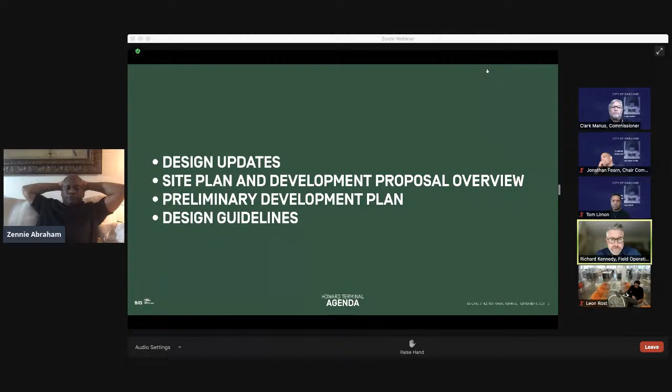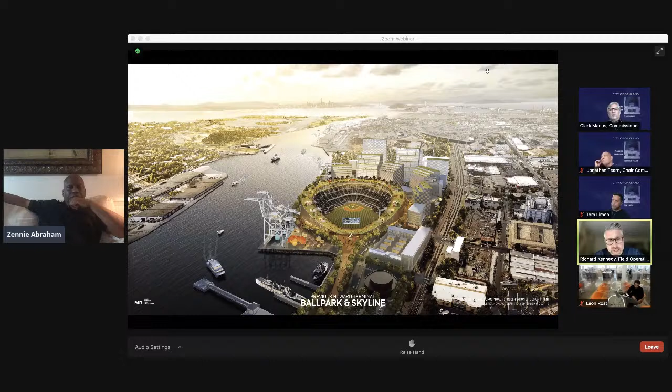This was probably the first rendering that came out about the A's development at Howard Terminal. This was, I believe, in 2018 — the first concept and vision of the Jewel Box ballpark, oriented to Jack London and the Oakland skyline, as close to Jack London as possible, with the adjacent developments just behind on the west-hand side, and then a contiguous public realm that wraps the water's edge. Of course, over the past two and a half years or so, the project has been evolving, in some ways big and some ways small.

This rendering shows some of the larger adjustments, most notably the rotation of the diamond in the ballpark, where the prior diamond faced directly to Jack London. The diamond has been rotated now to provide enormous amounts of views from all seats within the ballpark towards the bay and the sky. So just the simple rotation of position gives so much more visibility from visitors in the ballpark out to the bay and that resource. But additionally, it provides so much more frontage on the public side to look into and peer into the ballpark and all the excitement therein. I'll talk through additional adjustments as we go along.

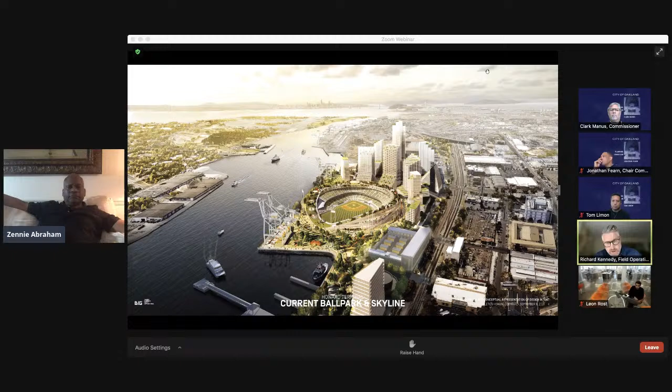On a project of this scale, we found it very important to make sure that as we shift and adjust and revise the framework and planning, it's cohesive — that there's a language there that allows it all to read as a coherent, unified, cohesive whole. That it feels intuitive and comprehensible to walk around, to find your way, and to encounter all of the spaces that we've been dreaming in, building into the plan.

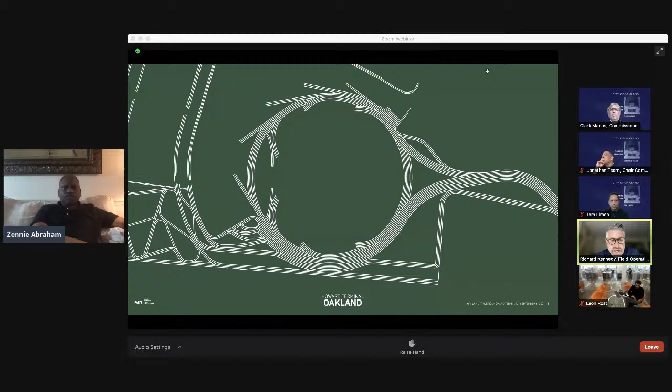And so the framework, as we've done it, is organized in inspiration around the icon of Oakland, the oak, with all of its branches and connections. And we've used that as a metaphor for how we think about circulation in the pedestrian realm, making sure that the pedestrian realm is fully contiguous, connected, universally accessible, and that it's very intuitive on how to move and navigate around the space from one destination to the next.

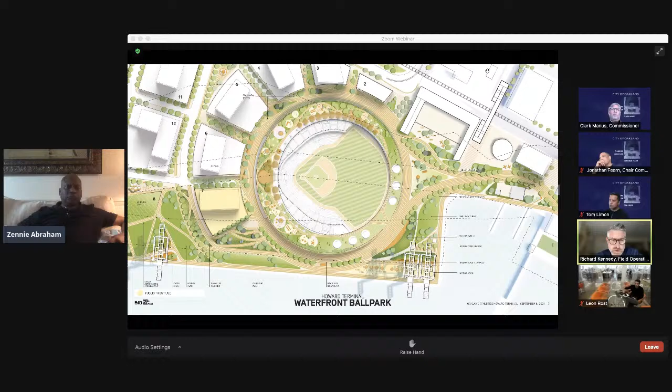So it's largely an organizational idea, but it can also be a material idea in making sure that the ground plane and pedestrian ground plane is specifically cohesive, unified, familiar, as well as being durable and robust to stand all the use that it will receive. And so that language carries through the entire plan, the waterfront, sidewalks and pedestrian realm, and the framework of streets as well. In this plan, you're seeing the full development blocks and arrangement, but you're also seeing the network of public spaces.

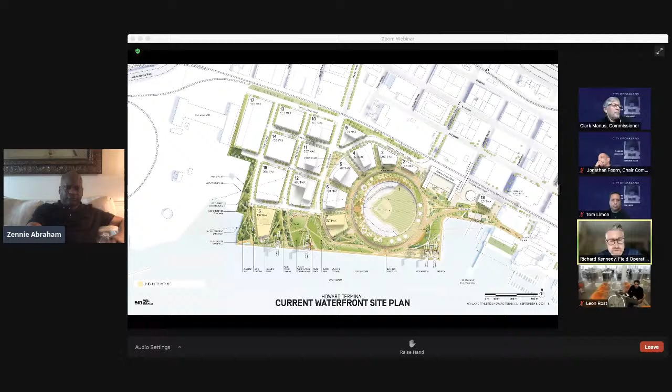All of the green and orange is effectively the public realm, the open space, the trails, the pathways, the plazas and patios and porches, and the green gardens, park spaces, and recreational spaces, making quite significant additions to the waterfronts for West Oakland and Jack London. And this is now an aerial representation of that full plan.

Of course, with projects of this scale, connectivity and circulation and transportation are always a challenge. And for the Howard Terminal site in particular, there's no one solution. It's a multifaceted solution. You can see on the diagram on the right-hand side, which is the percent of arrivals during game day. You can see that they're fairly well distributed from Market Street all the way to Broadway in terms of how people are coming there in various forms.

It's largely pedestrian on the eastern side, more vehicles on the western side. But again, the proportions are largely distributed. Bicycles are then factored in the middle, specifically on Martin Luther King with a designated bike route and entryway.

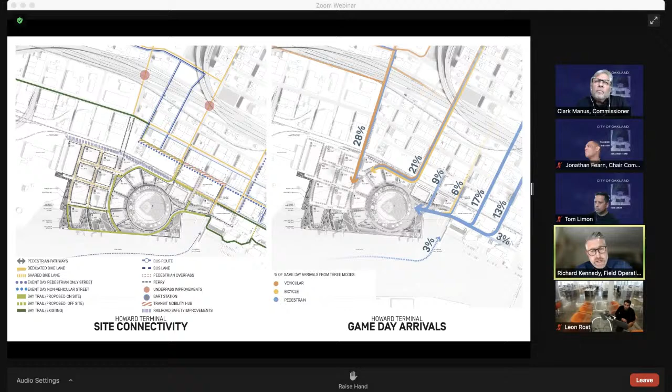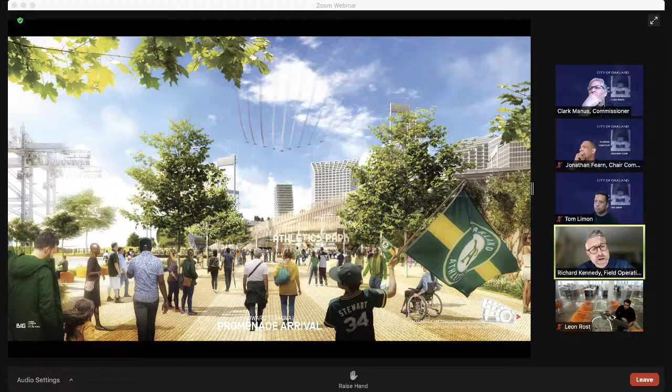The ballpark has been rotated from those initial inceptions, and we think there's a number of key advantages. Most notably is that we're able to still have a picture window that's directly on axis with Jack London, that prior to game time, or maybe possibly even between innings, there's an open window into the field of play and all the energy of the ballpark. But during the innings, the screen would drop down.

You might recall in earlier renderings there was a floating screen at the saddle point, that low point. The advantage of rotating it is that we can now nest the batter's eye and scoreboards in the ballpark without blocking views of the bay. So quite an important adjustment.

Furthermore, the language of the ballpark now pulls you in different directions, pulls you to the right towards Athletics Way, which Leon will speak to in a second, and on the left towards the waterfront where you get magnificent views into the ballpark itself.

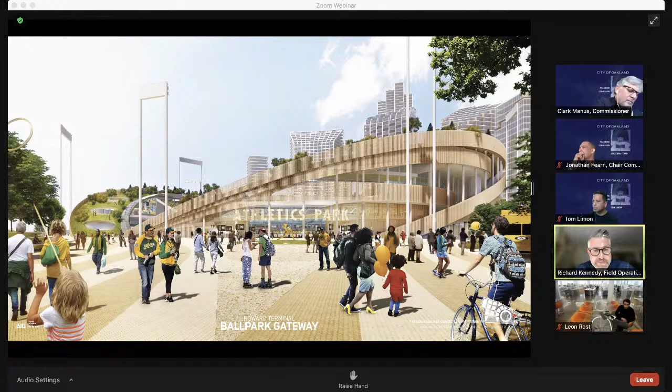There's also a number of logistics in servicing a ballpark, transportation, ball players, all of the servicing needs. Rather than have a back-of-house, one of the main urban design moves here is to lift up the pedestrian realm, what we're calling Athletics Way, that extends from Jack London and wraps the ballpark in a circular pathway, to lift that above the servicing. Have all the servicing then go below that elevation, so you're not interrupting with emergency vehicles and all of the ball player traffic and so on. So the pedestrians have a contiguous environment.

And this is a contiguous environment that also serves as a pedestrian realm during non-game days, activated by retail on both sides.

The other thing you'll notice in the renderings is the rooftop ballpark. That is another jewel in the overall composition of amenities for the project. This is meant to be a really dramatic way of experiencing the ball game for families and everyone looking for a view of the bay and all the surrounds. But on non-game days, it also serves as a public park with public access.

This diagram demonstrates how that works. There's a variety of ways to get up there. Pedestrians can enter on the saddle, go up the stairs to get to that elevated point. Everything in blue there is level and flat and fully ADA accessible. During game time, there's also the ability to connect to each of the concourses through these portals, so you can step in and out of the concourses and access the rooftop.

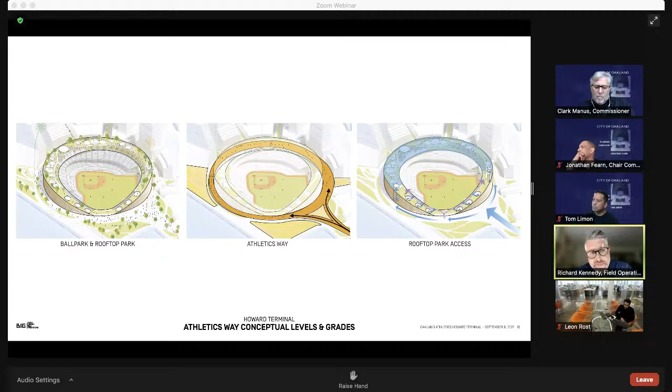But the key idea here is that we're trying to minimize the conflicts with all the servicing that goes on with ballparks to really make sure that the public realm and the experience of the new district, the experience of the waterfront is really celebrated and heightened, and that views like this, now elevated above the waterfront, can be achieved.

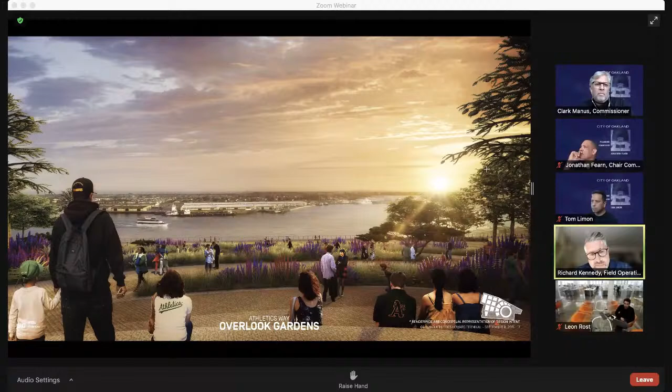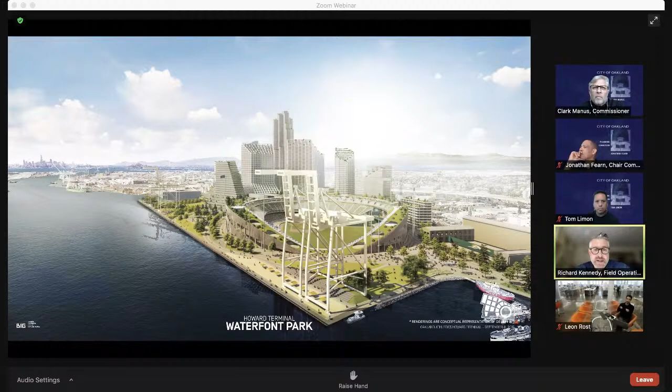The waterfront has then a variety of other spaces that are articulated in the guidelines and the PDP. A few more spaces I'll call out. Pier Park Green is in the southwestern corner. You can see the saddle of the ballpark coming down here on the right-hand side.

Open, flexible lawn, earthworks to create wind protection, but also screen some of the activity of the ballpark for those seeking quieter moments. The cranes provide another magnet to draw people to the water's edge. Shade trees and picnic furniture allow for a diversity of uses.

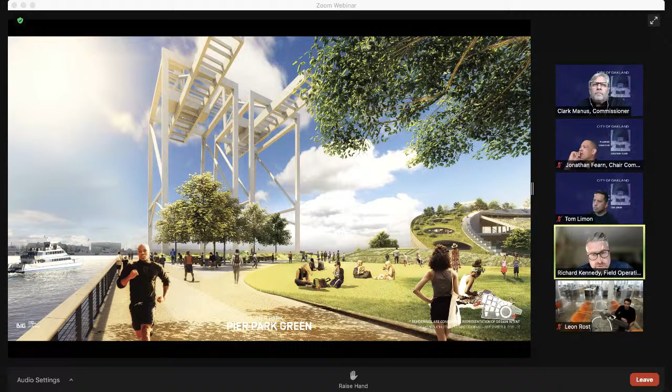A continuous promenade along the water's edge makes, I think, great prominent frontage for the ballpark as it meets the water. Different ways of navigating the grades, turning those grade adjustments into generous sloping walkways, but also steps and seating terraces, other places to enjoy the view.

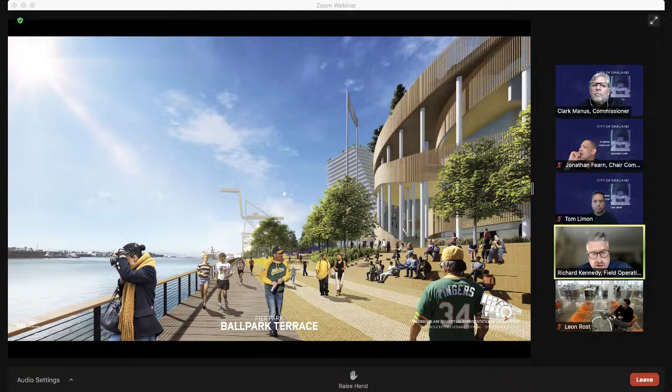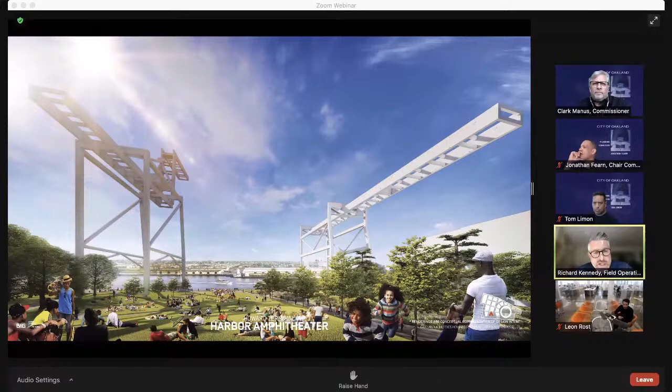And of course, great garden and park spaces along the water's edge provide a diversity of settings with different capacities, some larger and flexible like this view here, some more intimate and garden-like as shown in this rendering, with different nooks and crannies along the water's edge to appeal to as broad a community as possible.

So with that, I'm going to transition to Leon and let him finish some of the urban design framework and walk through the PDP and design guidelines. Leon? So Leon, we're at twelve and a half minutes.

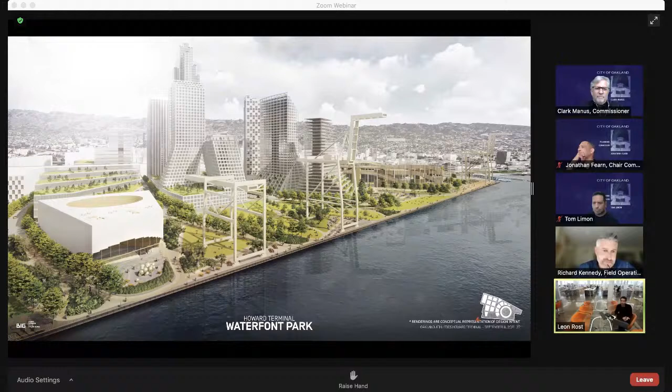Okay, I'll just whip through it. Thank you, Richard. Good afternoon, commissioners. Thank you for your time today. I'm excited to present to you some of the urban qualities of the master plan, as well as some of the updates on the ballpark.

These diagrams show how the urban framework performs on both game day and non-game day, creating a secure perimeter around the ballpark, but also allowing for the public to circulate around, including the Bay Trail access in green in the bottom left.

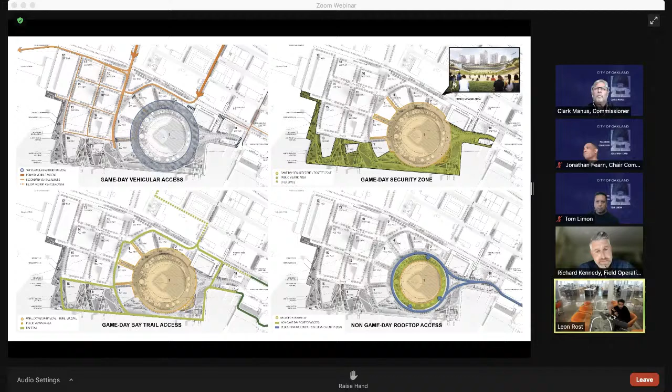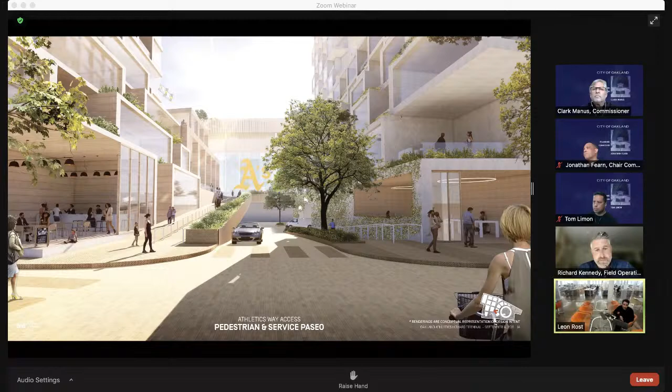This shows one of the conditions of the paseos that allows underground access to the back of house, tucking all of that away out of view. The next slide shows the majority of the paseo conditions, which are pedestrian-only access points towards Athletics Way, the ring avenue around the ballpark above. And you can see the ramp that provides an accessible route to the top.

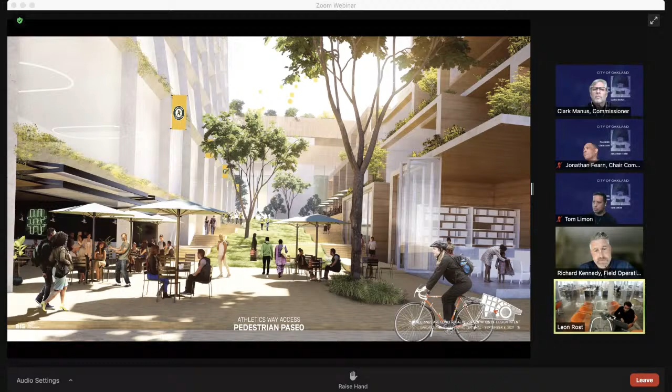A view of Athletics Way, a circular avenue that really draws people around the ballpark and takes you to the front of the bay.

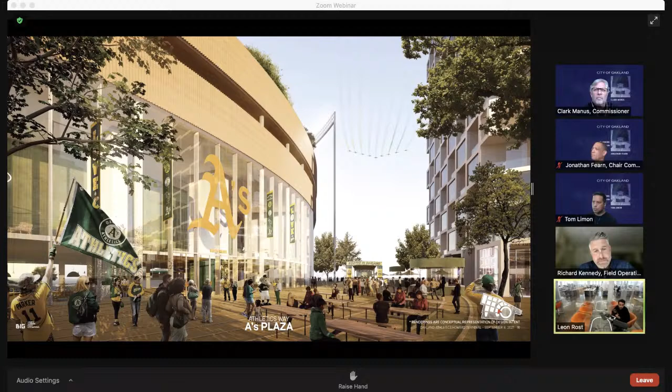In the overview here, you can see how Athletics Way starts at Water Street on the right side of the screen, goes around towards the district, and comes down towards the waterfront. This view also shows a snapshot of the updated ballpark design.

The next slide zooms in on that top tier a little bit better. We were able to reduce the scale of the ballpark by joining the rooftop park and the third concourse, which we believe leads to a more dynamic design and adds value to the seats furthest away from the game, and also creates an interaction that is unpredictable with the park as it circles around the ballpark.

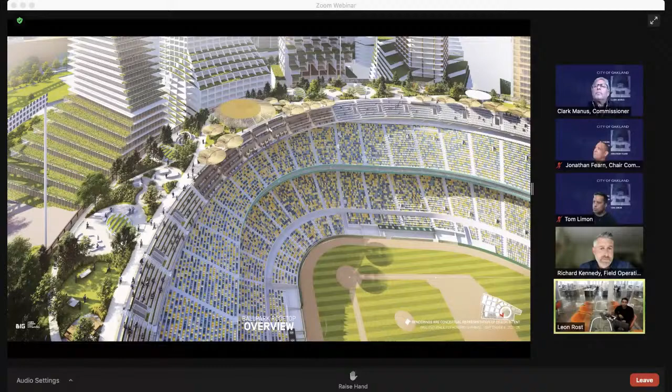Here you can see the saddle where the park promenade comes down towards that public viewing area. There's a mound here that gives you a slightly elevated perch just behind right field to get a glimpse into the game and play.

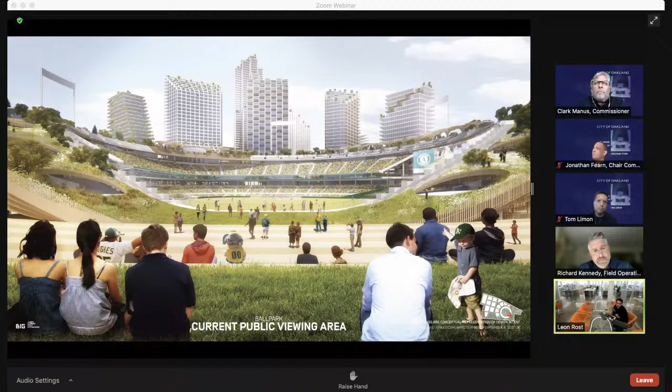The master plan buildings, which you can see in this view as well as the next image, are conceived as an extension of the bowl, so that the entire district is participating in the game and in the spectacle—perhaps not literally seeing the game, but at least enjoying and participating in the energy of the game in the district.

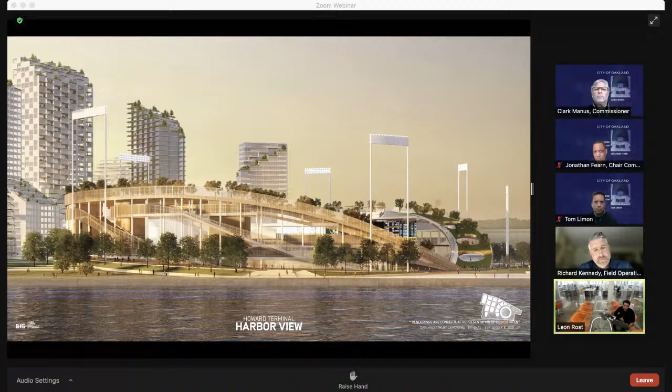Leon, I'm just going to give you another minute to wrap up, if you would, please.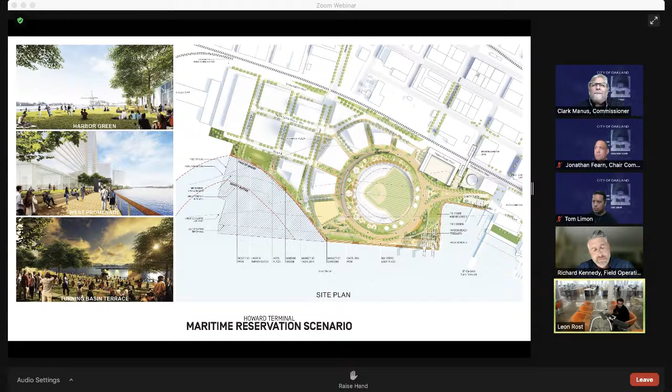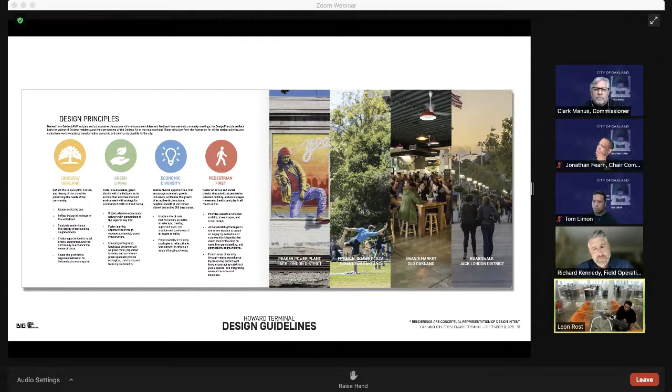Sure. This is just a reminder of the maritime reservation scenario, which shows that we still provide an active and vibrant waterfront. The final four pages are just to say that all of the documents you receive for the PDP, as well as the design guidelines, are intended to enforce and make these visuals come to life through a series of guideline principles, as well as more specific

guidelines and recommendations about street characteristics, which deal with everything from massing and character and articulation and planting, to ensure that this becomes a lively district and a successful district, which is our common goal.

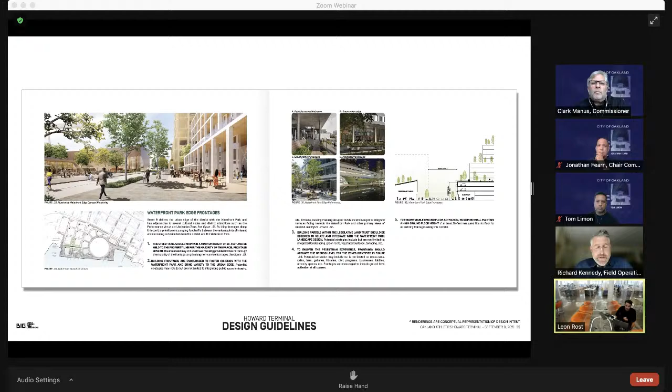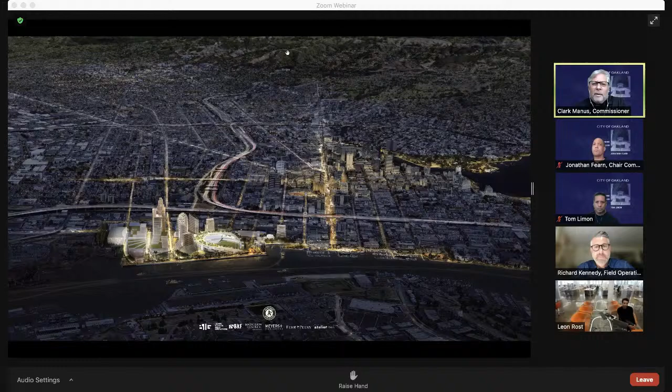Thank you. Thank you, Richard, and thank you, Leon. Commissioners, questions at the moment, or we'll go on to public comment? Okay, so Desmona, looks like we have some speakers on this item.

Yeah, so this is staff Pete Vollmann right now. For members of the public, if you would like to provide public comment on this item, now is the time to raise your hands. I do apologize, I am back. We were in the background. Okay, so it looks like we do have several hands called. The first one I am going to call on is Ben. If you could please unmute yourself to make your 2-minute comment.

And I'm sorry, state your full name for the record, Ben. Thank you. Yeah, my name is Ben Eichenberg. I'm a staff attorney with San Francisco Baykeeper. Okay, you may begin your 2-minute comment.

Thank you. We had a couple of concerns with some of the design guidelines and the plans that were released. We generally agree with staff that some more detail would be really helpful.

First off, stormwater retention. I feel like there's not enough emphasis on stormwater retention in the design guidelines and in the plans. Alameda County guidance says 4%, and they're going to try to meet that, but I think that guidance also states that there should be zero stormwater discharge. Based on the level of contamination at the site, they should definitely try to have a zero stormwater discharge policy, and that could be reflected in the design guidelines and in the plans as well.

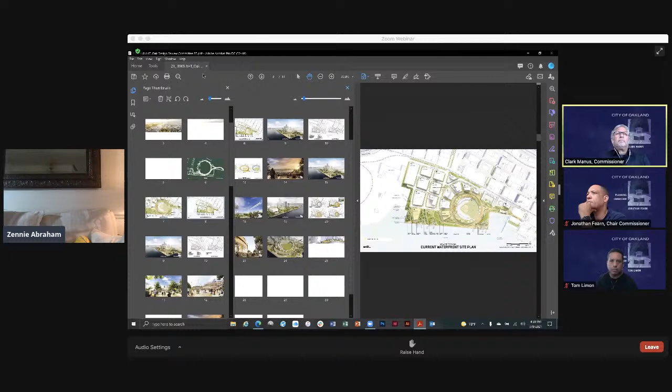I might go through a circulation diagram to start, given the question is about access. As I mentioned earlier, the western half of the site, everything west of Market, will be surface parking for the first many years of the project. Pedestrian access from downtown and Jack London would largely focus access on the eastern side as the first phases are developed.

Once the project is fully established, the individual towers would have parking for those residents built into their bases. I believe the guidelines, and I'd need Noah to verify, allow for the potential of a west side parking bank to support overall access needs for ball game days.

In the event that by the time the project is fully developed, modes and preferences haven't evolved much and there's still a lot of reliance on parking, there's flexibility built in to establish that western block, adjacent to the more industrial edges of the port, as that parking bay.

Alternatively, there's individual parking for the residences, office uses, and hotel, all built within their individual parcels. Those would be multi-level to accommodate the quantities required.

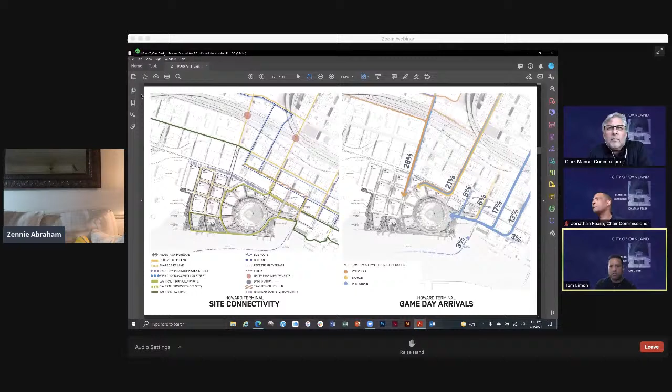Of course, I'll show this diagram here. Orange in this upper left diagram is vehicular, and the thickness of the line equates to capacity and volume—thinner means less traffic anticipated, thicker means more. Primary vehicular entries for servicing as well as visitors, residents, and game day users would be on MLK as well as Market Street.

For players, servicing, VIP, and all access that goes under Athletics Way, the route is: come down Market Street and enter into one of the two vehicular paseos that Leon shared. There are two different formats—the vehicular paseo, which has pedestrian ramps flanking the buildings and a ramp down below Athletics Way in between, and the fully pedestrianized paseos with stairs, switchback ramps, and vegetation planting to make those pedestrian environments.

But service vehicles and loading vehicles would enter below Athletics Way on one of those two passages, access all the servicing needs below, then exit out the other, connecting back to Market Street.

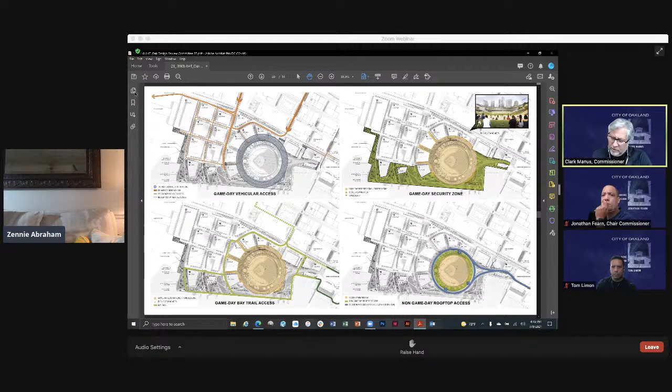First, I want to thank Pete for a very detailed staff report with a lot of questions in my mind that this hearing has brought out. So thank you, Pete. I think we share a lot of the same views that you do.

So I'm going to be very specific about some of them, and I'm not sure whom might be best to respond. Let me talk for a minute about the height and the assumptions there. I'll ask Pete, and then I don't know whether it's Richard, Leon, or Noah who can talk about the tower assumptions. The use of density bonus is assumed to be a given part of the height that is being granted. That's a question for you, Pete? Or would we see density bonuses that would push the heights proposed here beyond what is being proposed?

So as it stands right now, the project is fully baked in on this maximum unit count. If they wanted to alter that, there's CEQA implications, so they would need to go in and open up CEQA again — a revision to that process, at least in the form of an addendum and further analysis. As I noted with the general plan amendment they're asking for, the PUD kind of locks in what the development proposal is. So that is the project, taking into consideration the number of units. If there's units built on site, it would be part of that 3,000. For any affordable units or density bonuses, it would need to come forward right now, but they're basically creating a PUD that says this is what the building envelopes are going to be.

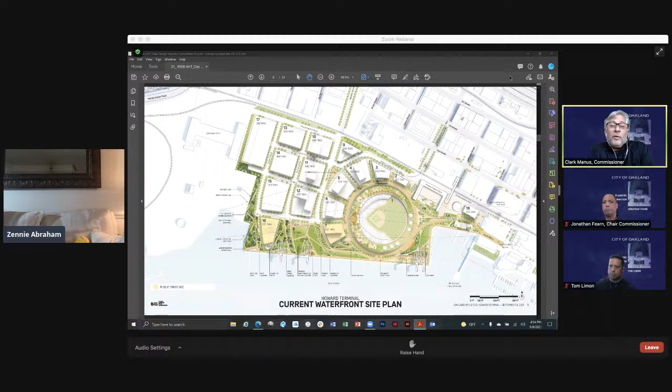So, just to clarify the question, are you essentially asking next steps? I am asking next steps because I think there's a fair amount of loose ends here, based on the testimony and a lot of things reflected in your staff report. How would DRC be able to review that in a subsequent hearing in order to field the issues raised as part of the testimony or other issues you flagged, versus it moving to the commission directly?

So we are trying to move forward at a pretty expedited rate. I would expect the A's will take the comments today, make revisions to the documents, and resubmit those to staff for review. Those documents will be posted on the city's website through Accela. I've created a project page that keeps the preliminary development plan and associated guidelines on there, so as revisions come in, they will be posted there.

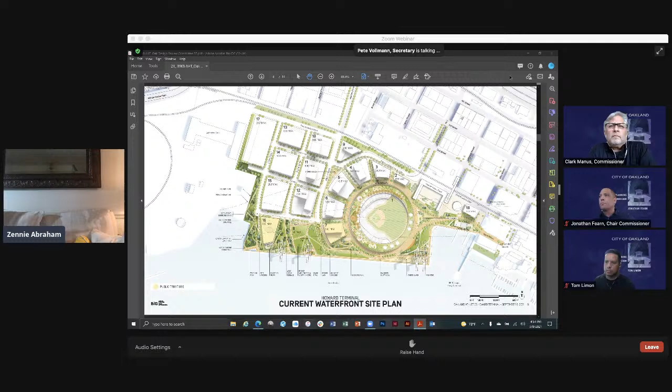Anybody is free to take a look at those and provide additional comments. If the committee does want to see it back, you can certainly make that request - that's within your right. Often on a lot of these projects, we will take direction and incorporate those in, and if we feel that direction has been achieved, we will take it forward to the commission with an explanation of that.

Sometimes there'd be a few outstanding additional comments that we have that they need to incorporate in or add as a condition of approval. That's often how we've dealt with it in the past on some other projects. Some other projects come back again.

Commissioner Fearn or Limon, other thoughts here as to where we are relative to the discussion on the proposed project? Yeah, since I won't be on DRC for the next meeting, I wanted to give some feedback. Overall, this is a really exciting opportunity for the city and for the waterfront. There are issues related to coexistence with port facilities and port operations, but as long as the A's are able to work it out, I'm excited about this project.

Looking at the thought process that has gone into the design of the stadium and the overall feel and placemaking of the entire district, I think it's been tastefully done, with a lot of thought and sensitivity to the character of Oakland. Sure, there are a lot of things to work out, and the public has made that very clear, but overall, I'm excited about this opportunity.

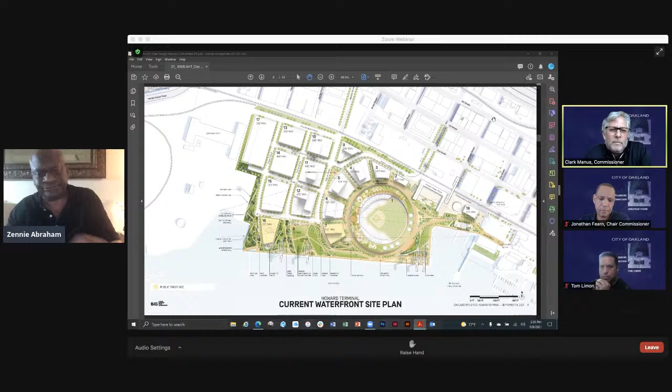No questions from me, commissioners. I would just say that we're grateful for the feedback. I hope you see that we are taking this effort very seriously. We want to get it right. We want it to be a loved place.

Projects like this are challenging in any case, but let alone with the uniqueness of a ballpark. So we are trying to thread the needle and build the right set of mixes with the right character and feel, and a diversity of attractions that make this something that all of Oaklanders and folks from around the region want to experience, even if they're not A's fans. But if you are an A's fan, it really will be something very deeply meaningful.

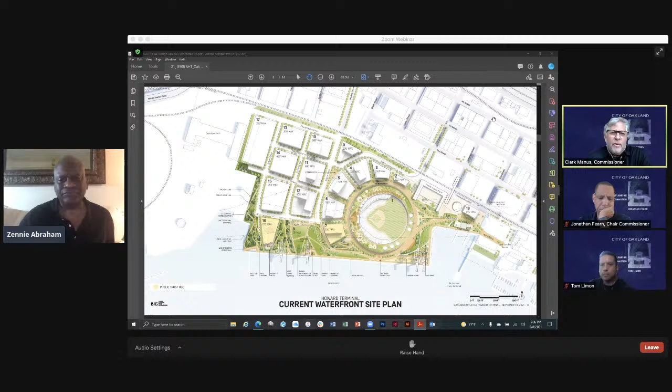So appreciate all of your feedback. It's all taken to heart, and we'll build as much of a response as we can into our next submission. And just to reaffirm, the commissioners individually are available if you need further feedback. And maybe with that, Dave, I know that we really wanted to focus this on design.

I apologize, you were not the spokesperson here. We were trying to look at the design character and stuff like that. Any comments that you want to share with us relative to our requests?

No, just that we appreciate the thoughtfulness in reviewing our design. I think we'll incorporate the feedback we heard today to make sure we can have an even better project. I think it's very positive, so really appreciate it. Okay, terrific.

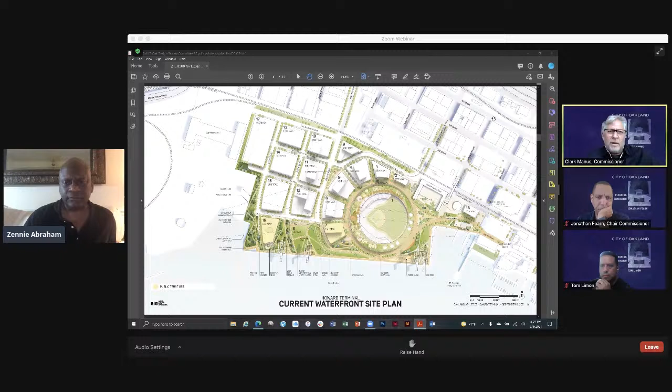Okay Pete, with that, commissioners, I think we're complete with that item. Pete, anything else you need from us on that? No, thank you.

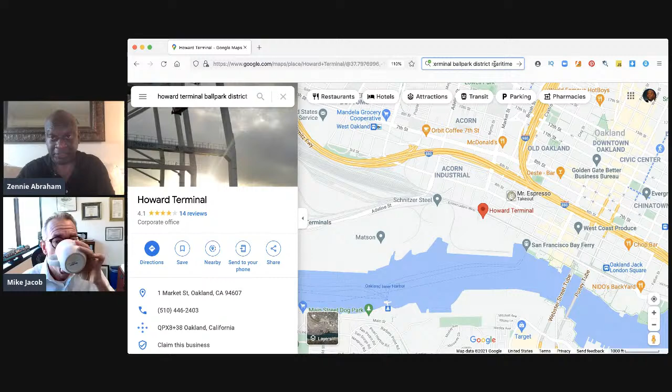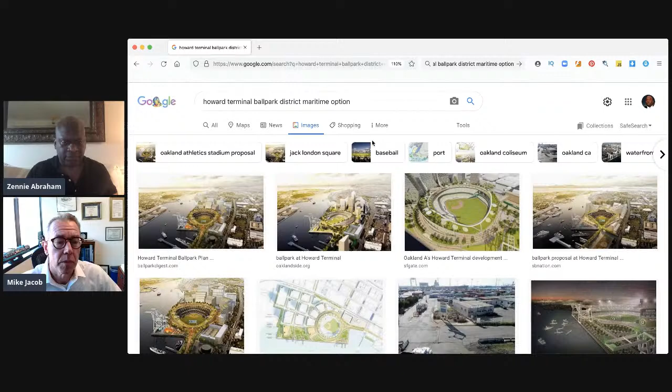I wonder if I can pull up the maritime option here while we're looking at that, and get your thoughts, because I think that would be a preferred outcome given the way things might go. I'm basically a fan of it myself. Let's see if we can get this in the appropriate map - and that's not the appropriate map. However, let's look at images, maybe the images will give us the alternative here. I believe that project overview doesn't include it. There's one with a turning basin - there it is at the bottom. Right here? Yeah.

Okay, I was trying to figure out if I can move this over or highlight it. I'll do it like this. I have a feeling if I take it over and go down, maybe there's a gallery. Okay, that's one. Then there's this, yes? Is that coming up here? Yeah, wait a minute, it's not coming up there. Hold on, I'm making an assumption - that's what happens when you fly blind. You got one panel over instead of the panel you want.

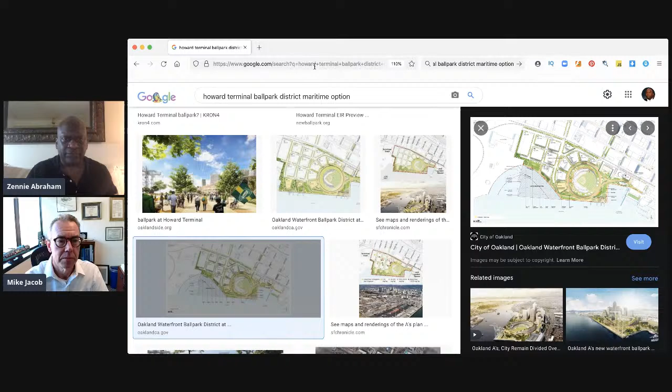So I believe this, put this in here and then click on it, and boom. No, didn't work, hold on. This one, yes, come on Zennie, undo yourself, this one. It's not... I'll scroll down here. Let me see what's going on. It's not opening the gallery in StreamYard, so I think I'm going to have to. Yeah, it's not, let me see here. Okay, it's not, let me get rid of this one.

There, and then let me pull up the other one. Share this screen. Stop that screen. Go back, share this screen. And we've got, let's see this one. Yes, voila, there we are. Excellent, yeah, so we are there. Okay, now that's the preferred option. Can you discuss that for the viewers?

Yeah, so you see the outline there in the bottom left-hand corner. That's the western corner of the site, where the terminal is now. And those hashes represent what would be removed. It represents, under different variants, between 10 and 15 acres of the total site, which is around 50 acres. So it's not an unsubstantial portion of the site. And it takes away two full city block parcels of potential development, and then a lot of open space.

And the development portion of the plan that included a performing arts center also gets removed. The question really is, under the scope of how that works - in the case of the design guidelines, what happens with all the park and open space that was there? How do you maintain the number of units on less acreage, which means higher density for those remaining parcels? And ultimately there are some additional residual questions with respect to parking and things like that.

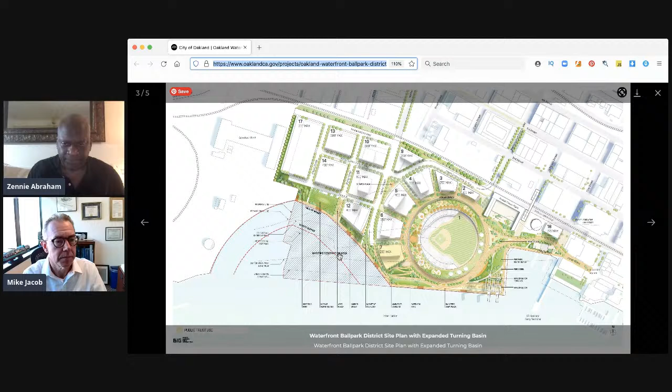I'm circling the area he's talking about with his hand. You see that? It's not a glitch, that's me moving that hand. That's the area that Mike is talking about.

Has there been any movement on this with respect to the A's or the city? Has either party said, 'Hey, you know what, we need to implement this'?

Yeah, well I think the good news is that the port very specifically included the maritime reservation scenario in the term sheet that it had adopted with the A's back in spring of 2019. And so, moving forward, it is now part of the project description. It was included in the draft EIR. And so the city's acknowledged that it's there, as the lead agency in the preparation of their environmental docs. The A's know that it exists and that it could potentially change the scope, scale, and size of their entitlements.

And then in the ensuing two years, what has happened that's really positive is the port has taken the next step, which is engage the Army Corps of Engineers, begin to do some preliminary engineering studies and review that are necessary before you take the next series of steps - which take a really long time, by the way - for the Army Corps to identify projects, to go through a NEPA process, to identify the project, ultimately through an act of Congress and a Water Resources Development Act reauthorization bill, and then ultimately to get appropriations to start that project after all the environmental clearances are done. That's a multi-year process, it doesn't happen soon.

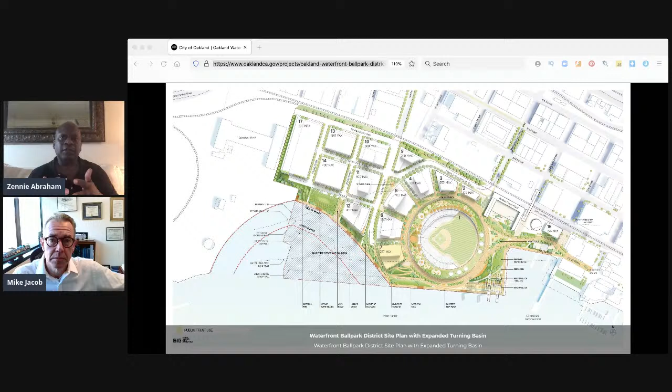And my point is, if the A's are bent on causing that amount to be built, even half that, 7.6 billion, then we should make sure that at least $2.5 billion is built year one to activate the base year assessed value, so you really get a big chunk of that tax increment at the back end. And yet, what's so frustrating is that kind of dynamic thinking does not even enter this project.

Well, I think that goes a little bit to this question that was coming up in the Planning Commission meeting today, but it just reemphasizes the point. If essentially what you're talking about is balancing your entitlements, then you haven't changed that valuation very much under the option we're talking about. And actually, when you've gotten rid of acreage, it's mostly open space, so the tax increment value for that is nothing.

I mean, it shouldn't change. And that's the thing about it. I don't mind losing that, right? It shouldn't change the math very much.

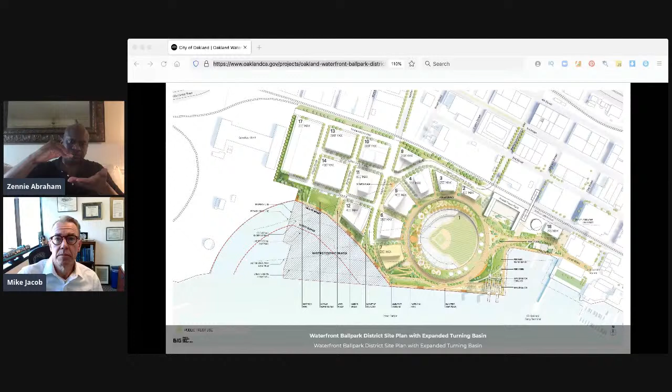But when I say dynamic, folks, I don't mean like when I say 'so dynamic.' Dynamic means it changes with respect to something. That's what dynamic means. So they could have a matrix of sources and uses based on the size of the bond issue and when they want to do it, phasing in. I did that way back in '96 when I was proposing a different type of redevelopment for the city. So it's doable. It just boggles my mind why.

Let me ask this and let me help Barry get me out of this, okay? Barry says, is there hope once the ballpark is built, Howard Terminal would get a major lease tenant, considering they don't have one right now? That doesn't necessarily get me out of it, but that's an interesting question.

Yeah, I think the answer to that in the short term is no. From our perspective, what we're really doing in the industry right now is consolidating around larger acreage, and this is one of the things that, unfortunately, we might not have enunciated very well, and it's something we get a lot of questions about. So I think Barry's question is really good. Howard Terminal is not likely to be a large container terminal ever again. And when we get that thrown back at us by folks, they say, well, you just don't need that acreage.

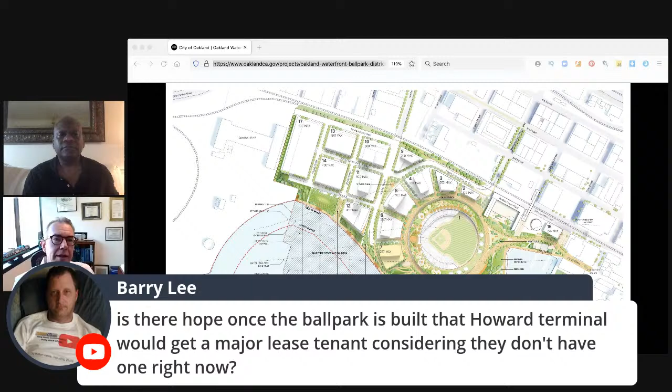One of the reasons why LA and Long Beach is so huge as a port destination is because it has the Inland Empire, right? You don't have the type of business you have there unless you have all the support and ancillary services and the warehousing that's millions and millions of square feet of warehousing space. We just don't have that.

What we have done with Howard is we've made it essentially an open air warehouse where we can have containers sitting for a short amount of time, and cargo owners can move there and stage. That's a good thing, but it's a relatively short-term use. We've only been doing that for a couple of years.

Right now with the pandemic, we've been seeing record volumes. We have essentially a virtual 100% rented out and built out warehousing and distribution center portfolio on the West Coast. We have no vacancy basically on any square footage anywhere. So we just have high demand for industrial transportation property. We want to keep as much of it as we can.

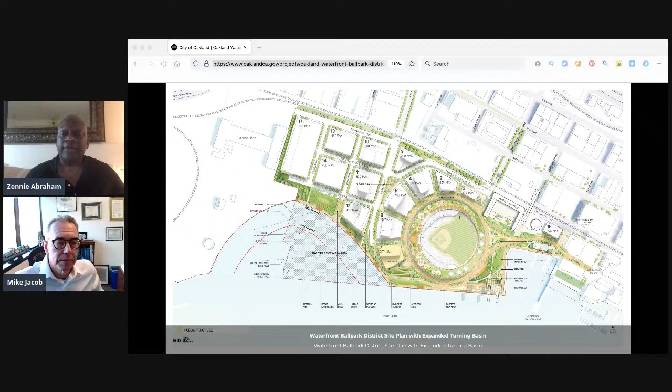I also asked, is it even feasible with COVID now to be able to redevelop at Howard Terminal?

I'll take that one. I think where we're at, I hate to use the term new normal, but I don't know that the virus is going to go away. I hope it does, I hope we find a cure for it. I believe it was person made and it got out, and how it got out I don't know, but it got out, and it's got too many variants for me to believe it was an accident.

But it doesn't mean we stop building. I think the way this is impacting our governments and our lives is that governments have to pump more money into the economies to make up for the market value that's being squeezed out of them because of the cutoff in this movement-based system that we have.

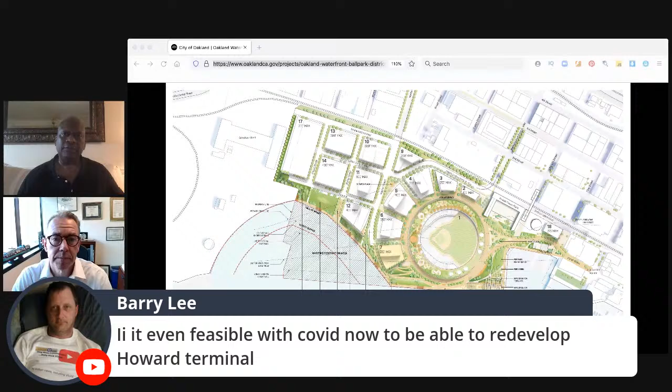The number of people that aren't here or can't travel from other places in the world, that hurts us.

I think it's super practical. Maybe the more philosophical answer though is we're always going to have more people, we're always going to have more pressure. We will find a way to coexist with this virus like we do with every other virus. People will eventually be looking for places to work, places to live, places to recreate, and places to socialize. So the pressure is always going to be there.

What we want to do in Oakland is smart transit-oriented development. How do you take this core, which has always underperformed, and create value out of it? And in the process of doing that, we want to facilitate a conversation where we ask the question of how do we densify our core?

How do we create equity? How do we create economic development? But also, how do we preserve our industrial lands we've invested billions of dollars in, and make those two transportation networks that are really kind of at odds with one another, one moving people and one moving goods, how do we try to make them as seamlessly integrated as possible?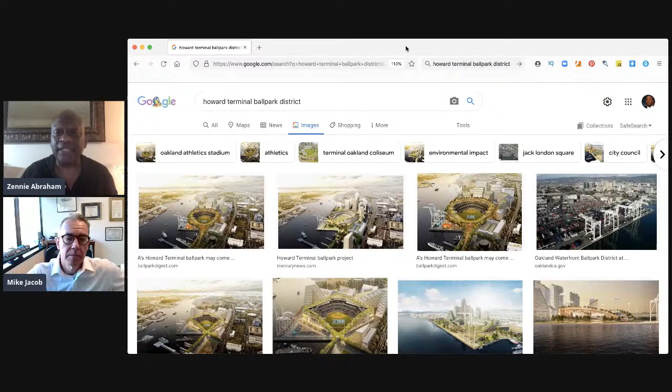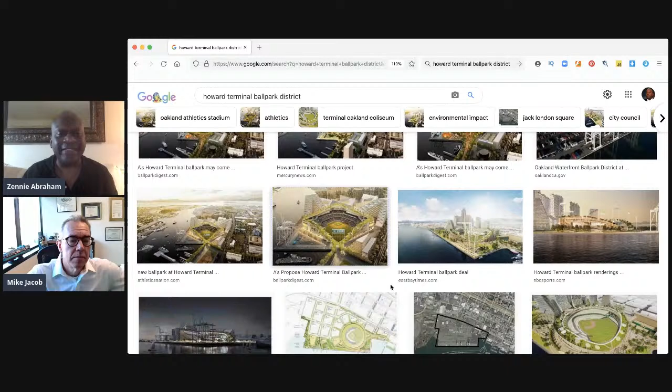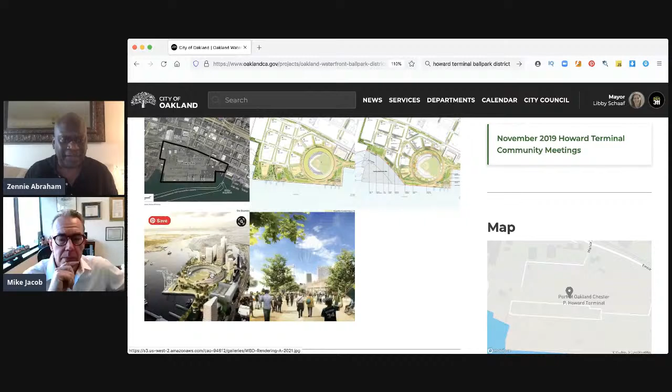Okay Barry, you see these artist renditions, let's take a look at any particular one of them. Basically these buildings are not all offices. Let's take the initial one. I'll click on all, scroll down here to the gallery, and pop this out. I believe you can still see that. Yeah, okay, those structures are not all offices.

They are market rate. The original idea was to have market rate, but the negotiation now is to have roughly 35% affordable housing.

When I took the idea of using tax increment financing to Dave Kaval on April 17th, 2017, the idea was - because I told him you're not going to get this done without building affordable housing - to use it to subsidize affordability on the site and around Jack London. That was the idea. Somehow they got disconnected from that, and now it looks like they're back to that discussion. But the bottom line, Barry, is the idea is to have some combination of apartments there.

You can rent. Art Clark says, ask Mike about the feasibility of growing the Port of Oakland just across the estuary in Alameda - it's open space from the port. He says, come on, let's think win-win, ballpark and a bigger port, something like that. What do you think about that observation, Mike?

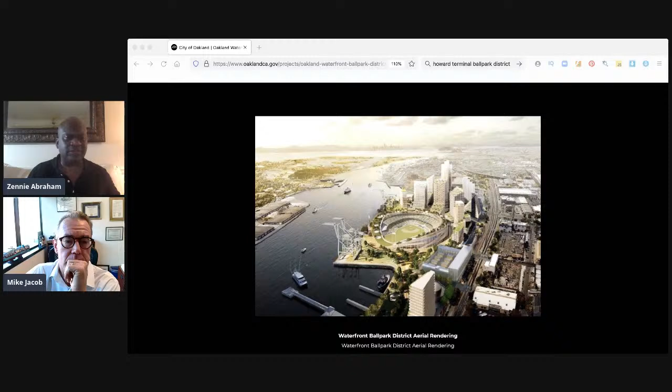That would be incredible if there was a way to actually get to and from Alameda, and I say that with all seriousness. The development of Alameda Naval Air Station has been such a hot potato for decades, and a lot of it has to do with access and transportation. If you look at the original alignment for 980, it points right at Howard Terminal and right across the estuary - that's not by mistake. But there's absolutely no way you're going to expand any direct highway access to Alameda in that direction. That was certainly part of the original plan for why you did that alignment.

Alameda - you just can't take that space just because it's there. I would say if the Oakland A's were more interested in developing on that side of the estuary, that would make more sense than trying to take port operations over there. They have a hell of a view of the city, but they have the same access problem. I never thought about that. You're right - that would be solved, especially if they're going to build the gondola. Problem solved. Basically, take Howard Terminal, put it over there.